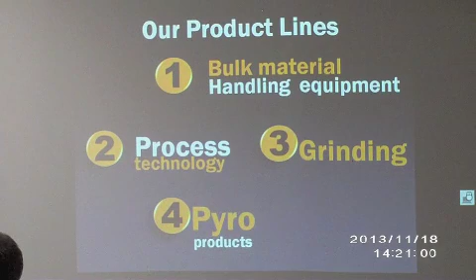Metso worldwide: bulk material handling, apron feeders, paving, ship loading, unloading systems, not like we used to do many years ago - all the car pullers, process technology. There's a really good brochure on the process technology - the grinding, the kilns.

Crushing and screening, which you guys are probably most familiar with. And when we hand out the binders, pass this one around too, because that shows all the different names that Metso has acquired. You guys will maybe see some of these names - not just Stephens-Adamson, but Nordberg, Allis Chalmers, all the different lines in the quarries and the pits. It's all Metso now.

What was Svedala is Metso and then some. Nordberg was originally one of the main names of Metso.

In June of this year, we had a kickoff, and screening conveyor solutions and conveyor solutions became one group. Now the main offering to you guys, when I hand out the binders, there are a couple brochures in there with products that I probably shouldn't have put in there. It doesn't mean you guys aren't going to have access to them down the road, but things like the truck box liners right in the front - right now, we're still overviewing exactly who we're obligated to contractually.

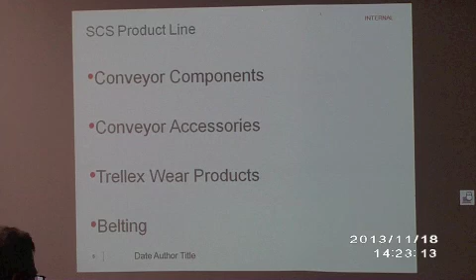Now I want to go over to this one. This one kind of takes a minute or two to boot up. This is the past, this isn't what we offer today, but I really wanted to bring it with me, even though it was way too heavy for my carry-on baggage. This shows everything Stephens-Adamson did years ago, all the products that we did.

Now there is still maybe sliders and a few products in there, but for the most part, it's all the bulk material handling equipment. Just shows you a little bit of the history of Stephens-Adamson.

Sealmaster bearing line - you guys familiar with that line? Yeah. Manufactured, engineered, and designed in Belleville, the plant where I started with. The lady who's our fill-in front desk receptionist, she started on the Sealmaster bearing line when she was 18.

I sat and listened to her for one of our acquisitions - when we were bought out by Borg Warner, Borg Warner wanted one thing from us, and one thing only, and that was the Sealmaster bearing line. They got it, kept us for like 3 or 4 years, got rid of everything else, but kept the Sealmaster.

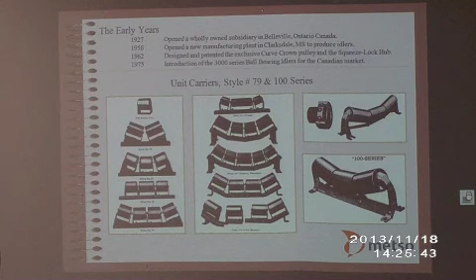In 1958, they opened a manufacturing facility in Clarksdale. The Belleville plant has just recently closed. The company took a big undertaking financially to put all the equipment under one roof in the Clarksdale, Mississippi plant. They put several million dollars into that plant in the last year or so - $7 million. They're already looking for a good return on that.

So with all the equipment from Belleville under that roof in Clarksdale, it used to be that the Clarksdale plant was just an assembly plant, while the Belleville plant was more of a job shop. The heavy duty idlers were done in Belleville, and the light and midi duty idlers were done in Clarksdale. Now Clarksdale is doing it all.

I don't know how familiar you guys are with the oil sands in Fort McMurray, Canada, but that's been one of our number one customers since the 70s. One of our plant managers, now our technical manager, Corey Goody, went out there in the 70s. I'll show you the idlers they have in there - they're actually CEMA F, and they're working on a CEMA G rating for the idlers right now. We manufacture idlers, and there are one or two competitors that manufacture idlers that are actually G rated, which is still being established. F is the highest that CEMA recognizes.

Here's the CEMA book too. We'll get that going around.

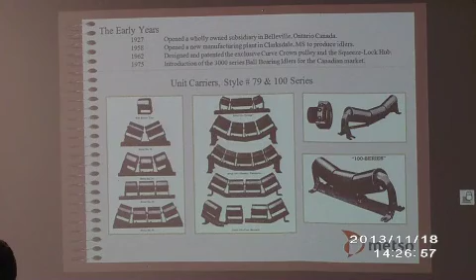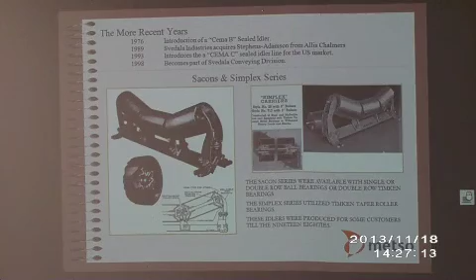You were your own - okay, so there you see where it comes, when it became part of Svedala. As I said, in the fall of 2001, Metso acquired Svedala, and I think they learned real quickly that they acquired a very big juggernaut.

The Dynapac compaction paving - they sold that line off right away, and they got a really good price for it. Gardner Denver down the hole drills was part two, and they sold that line off. I was actually involved with that line a bit.

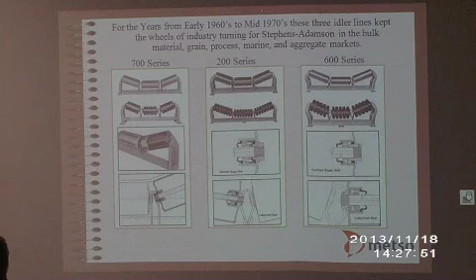So here's some of the older idler series. Some of these, some of the ship loading and unloading systems still utilize these today, and they'll call in wanting replacement rolls for idlers that were put in back in the late 60s, early 70s. There's all the idler series.

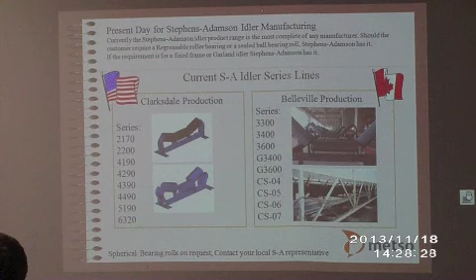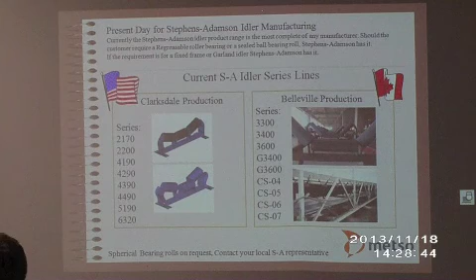To be honest, one of the things we're doing right now is we have such a huge idler line that we can offer some things our competitors don't, like offset frames - only one competitor offers offset frames. Regreasable idlers, some of our competitors have that too. We want to always be able to offer our whole line, but we're not going to stock as much as we used to. It'll be more that if somebody still wants an offset frame or a particular regreasable idler that you got 20, 25 years ago, we'll be able to supply parts 98% of the time, unless it's a real rarity. But we're going to try so we can be more dedicated to what we do best.

Okay, so I'm going to go on. All right, let's get right into the idlers.

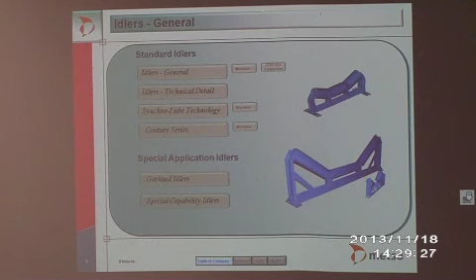Okay, so see these two idlers right here, let's try this out. That big idler right there, that's a 60 millimeter CEMA F rated idler that's used in Syncrude, Fort McMurray, in the oil sands - 84 inch, 7 inch diameter roll, 60mm shaft.

The little one there, that's an 18-inch CEMA B, which you'd see in the real smaller operations with 18-inch conveyors. But you're talking a big difference in price, big difference in technology, and when you actually see them together in person - the one's huge, the other one looks like a dinky car. But that shows the extreme of what we offer, from the heavy duty right down to the very light duty.

Alright, let's go back. Let's take a look at these.

How many of you guys are familiar with garland idlers? That's one of the idlers that's extremely utilized in Fort McMurray, as I mentioned. Some of the rolls are interchangeable, actually, from the garlands to the fixed frames. The advantage of garlands is handling irregular lump sizes, belt training, and transition point changes. There's not a huge section in the CEMA book on garland idlers. They're still getting everything straightened around on garland idlers as far as CEMA.

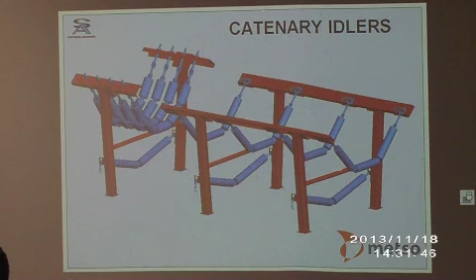Can I add something, Mike? Absolutely. CEMA, just so you guys know, regulates the industry and tells us what we have to do for belt measurements. So when you're looking at a belt, say a 36-inch belt, it's always belt width plus 9 inches for your foot spacing on idlers. So if you've got a 24-inch belt, just add 9 inches to it, and that's your spacing from foot pattern to foot pattern. That's standard industry - CEMA says that's what you've got to do. CEMA also tells you what roll diameter or bearing loads have to be, so they're very involved, to make sure we don't cheat with undersized products.

Every CEMA class goes from B, C, D, E, to F, but you guys for the most part will only be involved with B's, C's, D's, and E's in this area. Probably 90% of the industry here is B's and C's most likely. But they tell you it's going to be a 17mm shaft, or a 3/4 inch shaft, and you can't get away from that. CEMA just says do it.

So you have to be aware - when you're looking at conveyors with a 24-inch belt, whether it's us, Superior, FMC, or Precision, the bolt hole spacing is always the same. Doesn't change. That book I'm passing around is the 6th edition; they're currently working on the 7th. The only difference you'll see is in power plants.

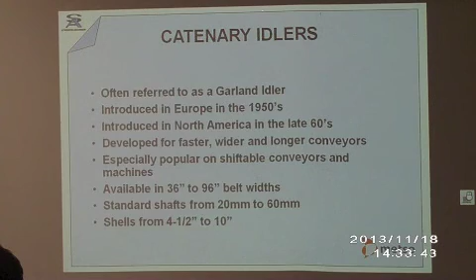Do you guys call on a lot of power plants? I don't. There might be some wide base idlers in there, what we call a wide base. If you see one, it'll be belt width plus 15 inches, and those will be wide base idlers. I'm glad you mentioned that - if you see that, just tell us it's a wide base, that's all we need to know. That's tripped up a couple of the CSRs over the years. That's how I started this company, as a customer service rep, so I remember that one well.

The frame - that kind of shows all the benefits of a garland. If you guys see garlands out in the industry, keep in mind there's no CEMA standards on garlands. Everybody makes theirs differently - can lengths are different, the hooks connecting the rolls together are different, and the hooks on the channel are always different.

What would be the typical industry that would use those? Long overland conveyors, turning corners and stuff, like mining - especially with irregular size mining material. So you won't see a whole lot here, not in western or eastern PA. You won't see a whole lot in this area. You might run across a little bit up in the northern part, with the shale.

But, you know, I've been covering this territory until my new position, and in the 18, 19 years I've worked for Metso now, I've only had 2 orders for garlands. They're not very popular - you run across them occasionally, but keep in mind, when you do, we have to have samples of them. We need measurements, because none of them are standardized - you just can't say it's for an 18-inch belt. That means nothing to us when it comes to garlands.

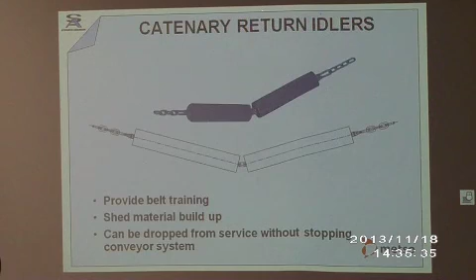3-roll, 5-roll. Yeah, with the garland idlers, we are one of the frontier companies with the garland idlers. And as I mentioned, Corey Doty in the oil sands in the 70s kind of tinkered and tested.

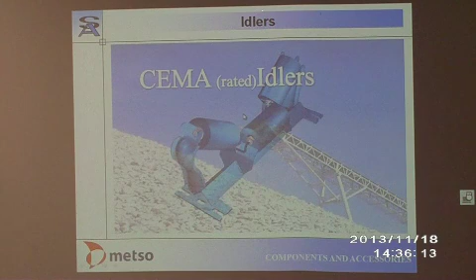Go back to the 21, go to Idler's General. And then go to 2100 series and go up from there, I think. I would have. Okay, I was getting there slowly, Todd. Okay, okay.

So I kind of already covered some of this, but it talks about CEMA, how they rate idlers. Todd actually hit on it better than I did. All right, let's get into it. You guys are gonna know almost all of this, but there might be the odd thing you haven't seen.

Can you go back to that first one, please? Absolutely.

So now, our return rolls are 3 inches longer than a lot of our competitors. That's the number I have in my head. Inch and a half to 3 inches longer in returns, most likely.

Returns are one thing that CEMA, even though the bolt hole spacing still has to be belt width plus 9, or belt width plus 15 on wide base, CEMA doesn't regulate to us what that roll has to be lengthwise on the return side. So all the manufacturers try to lock ourselves in, so we all have our own brackets and different roll lengths.

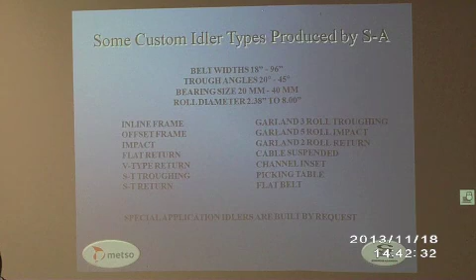Let's get, okay, let's hit on this one here. That might show us. So here's some of the terms: inline frame, offset, impact, flat return, V-type return, self-training troughing, self-training return, all the garlands, channel inset. You guys see many of the channel insets on the portable systems and everything? No familiarity? Couldn't hurt to go over.

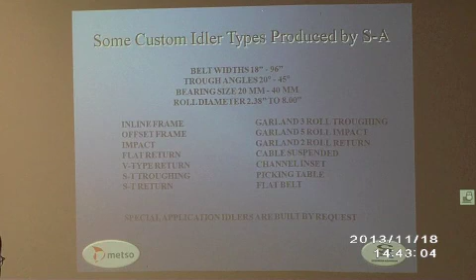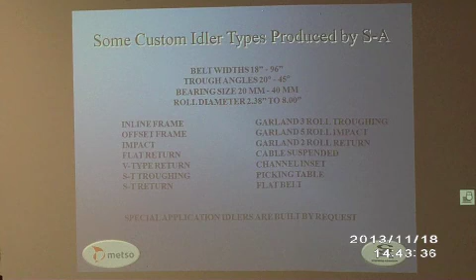Do you know the difference between a standard trougher and a channel inset? No? Okay, explain to them what a channel inset is. It's more like a bed box, and it sits down in, and it's utilized a lot on the portable conveyors more than anything else, right Todd? Yeah, basically a standard trougher sits up on top of the angle, on the trusses, and you bolt it together. A channel inset bolts on the inside of that channel. What it came out of was height restrictions on portable plants on the highway, so if they could lower it by 2 or 3 inches, it was a tremendous thing for them. But they get mounted inside the channel, not on top of the channel.

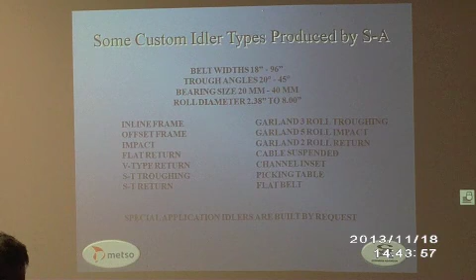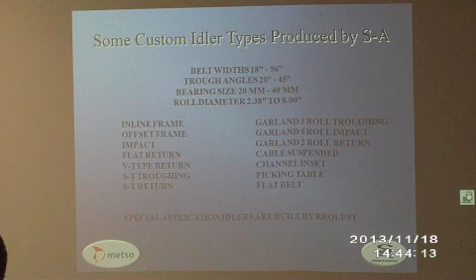You'll see them on a lot of portable plants, portable crushing plants, portable screening plants. You won't see them much inside the plants themselves, maybe a little bit at some asphalt plants. But it's probably only going to represent about 10% of the stuff you see out in the field when it comes to channel insets. There are a couple of our competitors who make that their day-to-day bread and butter, and they're a little stronger on channel insets than we are, but that's one of the things at the Clarksdale plant - with the revamping and all the money that's been put into that plant, they're looking at that more closely, and we're going to look at having a stronger operation on the channel inset.

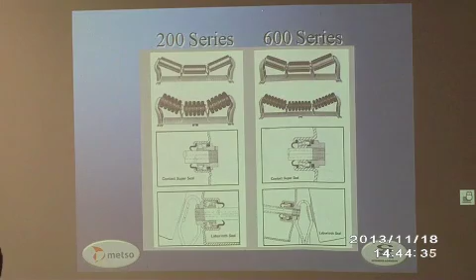Hey Todd? 200, 600 series, 3000 series, 2250. So did you guys catch that number in the middle? That's the 25 millimeter shaft size. The number in the middle, the number on the end - so if this is a 2255, that'd be a 5-inch can roll, and this number here is the shaft. So if it says 4395 - 4195 is a better analogy - that's a 5-inch diameter, 19 millimeter shaft. We'll get into that a little more.

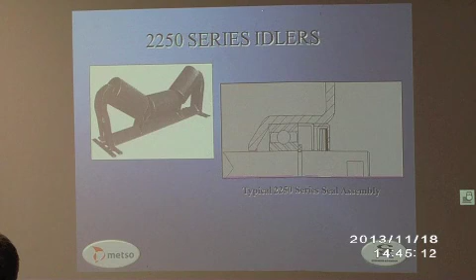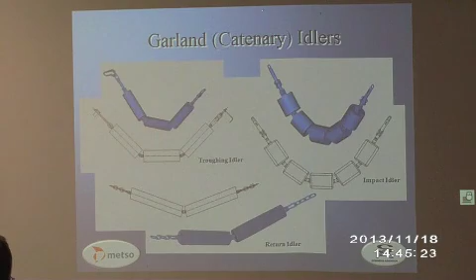There's a Century series. Are they going to rename that Century series? They're probably going to look into that a little bit, right? About the 3,000 series. Yeah. Let's get out of there. So Garland and Catenary are pretty much one and the same then? Yes, correct, absolutely.

Let's just hit quickly on the Synchro-Lube. There, now you start seeing - go back a little bit. I think this is kind of interesting when you start looking at regreasable idlers. There are a lot of our competitors who've basically discontinued them or just made them a special for regreasables.

We take great pride in our regreasable system and how it's done. Most of our competitors with a regreasable system, you cannot use air on them - you have to hand pump them or you blow the seals out. With ours, it doesn't matter what side you grease from, you can put as much air as you want on it and you will not blow the seals out. It's unique, and it's a system we call the Synchro-Lube system. Go to your first slide there, Mike.

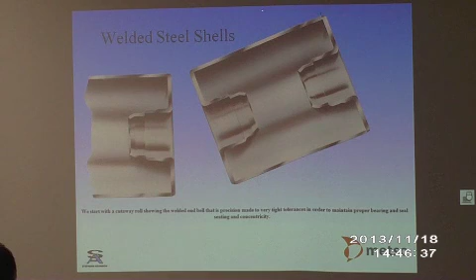There. Yeah, keep it right there.

All the shafts on the Synchro-Lube system are hollow shafts, so grease can flow through them all at once. Most of our competitors will just put a hole right here in the bearing cavity, and what they want to do is push pump grease through this thing, build up some pressure, and just have grease go in.

All you're gonna do... we've taken it one step further, and we've got these little compensating tubes we put inside there. Very small people at the factory get into that tube and put these little tubes in. We made the machines to do this, and it's just plastic tubing. It goes in the shaft and goes up the shaft.

When the grease is pumped through and reaches the other side, it wants to back pressure. So grease now is going in those tubes evenly through all 6 bearing points. So when you see grease come out of the seal here, it'll come out here, here, and all the way across at the same time. All the bearing cavities are getting greased at the same time.

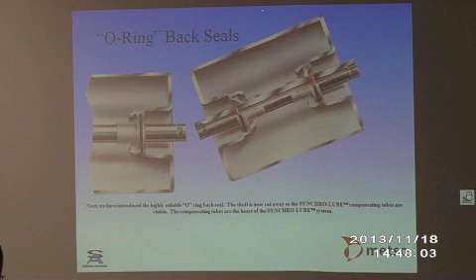Our competitors just have the grease -- you just grease this cavity, and that's it. The old grease is discharged into the can, so you don't know if they're being regreased whatsoever. The pressure relief they use is on their zerk, that's where they get the relief, the pressure off the zerks, and when they build up pressure and pop the grease thing off the zerk, you'll see the grease come down the zerk. That's the way they do it.

We took it one step further. We have it go through the bearing cavity, and then when the seal's on there, with our seals, the grease goes through the bearing, re-greases that bearing, and then goes to the seal, and it purges that seal out and cleans it out.

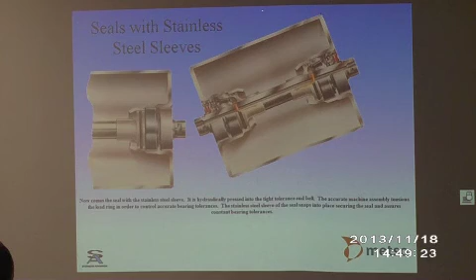Each seal has purge holes -- there's 4 purge holes on every seal. When grease comes out of those purge holes, you'll see dirty grease come out first, then you'll start seeing clean grease come out. That's how it's re-greased -- you know it's greased. You get all the contaminants out, all the water out, everything out, and it's done.

Every roller is connected using compression fittings. They're not just floating tubes in there -- they're all connected on compression fittings. So it's a sealed system. You don't have anything to release -- it stays in there.

And then the grease comes out on all the seals. So when you start greasing this side here, or the other side, it doesn't matter -- all 6 of those bearing cavities get greased at the same time. It's by far, and I think all of our competitors say by far, it's the best greasing system out there. Problem is, people just don't grease anymore.

I was down in the Caribbean a couple, 3 or 4 years ago, and we've been selling this guy idlers for years and years. He says, Todd -- this Jamaican guy, Billy Segura -- he says, Todd, I can't, rolls are failing right and left, they're just failing right and left.

I said, Billy, you're greasing, aren't you? He said, every week we grease. So I get down there -- just gonna take a drink first. I said, Billy, let's get your maintenance guys, let's just go and start greasing. Grab some grease and some guns, let's go. I just watched the guy, he just walked up.

He got about 10 rollers up. I said, come on back here, boy, come on back here, go back to that first one.

Hopefully it wasn't African American.

Sat there and pumped 57 pumps before grease came out. They weren't re-greasing it, they were just putting grease back in the shafts. That was it -- before we got to the 3rd roller, go get another case of grease. So when you see this in the field, someone says they're failing -- especially when it comes to re-greasable -- they're not re-greasing, they just take a couple pumps and call it done. But those hollow shafts take a lot of grease. A lot of it.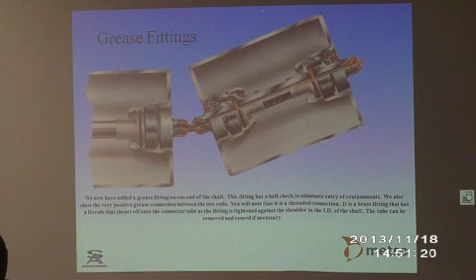So you're saying you can re-lube them from either side? It doesn't matter what side, the roller doesn't know which side you're greasing from. Do they come lubed from the factory? There's a grease fitting there on the end, that's all the grease going through the whole system right there.

We fill them full of grease when they leave the factory. We tell customers if they're sitting in your warehouse, especially in warm climates, or sitting on the job site for a month or so, re-grease them before you put them on. And it's correctly greased in the field once you can see the grease purge? Absolutely. You cannot over-grease them.

So you can use more, where do you think you see the industry heading here? Sealed for life ball bearings.

It used to be, probably 5 or 6 years ago, it was still about 60-40 — 60% for sealed for life, 40% for re-greasable. I'd venture to say now that re-greasable is probably less than 20% of our business. And the people that buy re-greasable only buy it for one reason: they want a tapered roller bearing, and that's it.

I keep telling you guys in the bearing business, what's a tapered roller bearing do when it's spinning? It throws grease off the bearing. If you don't re-grease it, that grease is gonna break down, become oil, and just leak on out.

What do you see with Magnus here? All sealed, yeah. The Canadian market went all sealed inline frame about 12 years ago, and then we went that way too. Because we had such a large offering, we weren't concentrating just on that one. Now we've even seen the FFCs we're replacing were greasable, but yeah.

I tell people to this day, the re-greasables have their place, nothing wrong with that. But you gotta be very cautious, because if they look at the cost now and they're not gonna re-grease — if they say I'm only gonna grease once every 6 months — don't put re-greasables in there. Just walk away from it, because you'll have nothing but failures.

Well, it's in every industry. Overall, manpower's down, but demand for production's up. So those places don't have the maintenance guys to be fooling with that anymore either.

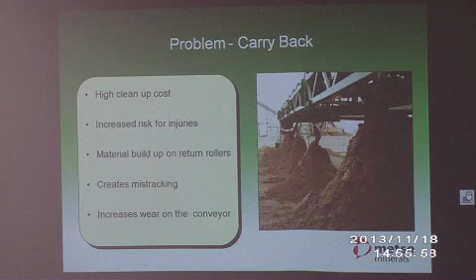All right, so carryback, right — one of the biggest problems for somebody in the belt cleaner industry: risk of injuries, material buildup, mistracking, these are common problems.

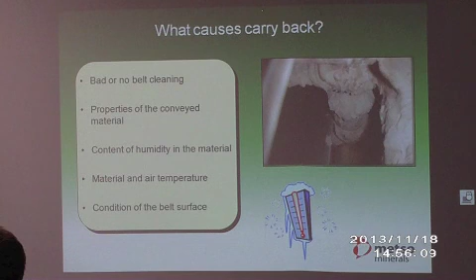Some of these pictures are good. You gonna let me know if any of these are the pictures you've taken? All right.

How many of you guys have installed belt cleaners?

It's been a little while since I've installed one. Todd injured his hand on one at a trade show. Everybody likes to tease him about that. Might as well, I sliced it up, maybe 6 stitches. So I'm not the one to install belt cleaners.

Can I ask a question before we go here? Yeah, absolutely. CEMA B, CEMA C, CEMA D - what differentiates the difference between a B to a C to a D? Is it quality, is it can size, is it angle?

It goes back to the envelope of CEMA that Tom was talking about with the shaft. Yeah, we can go back to your, you should just start, go to the idlers, and let's go through the 2100 series, 22, and the general, probably.

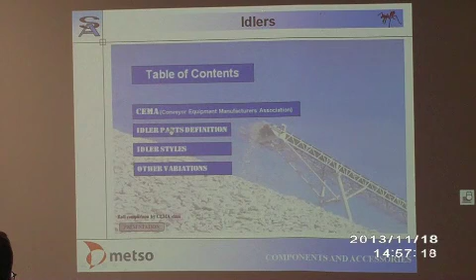Keep on going. I would imagine it's gonna be under here, or let's see. Table of contents, that's it. There's nothing else.

What's going on? I've got it probably in another presentation, but the CEMA, to back up a bit, it's load, right, and all your belt widths, your application, your material - the envelope of CEMA ratings, that's where it comes into play. If you have an 18-inch, 24-inch belt, light material, then you're gonna be a CEMA B, right? And depending on how fast it's moving, tons per hour, the application data sheets will help out.

So the further we go up the alphabet, the heavier it is. You wanna write this down? 2100 series, CEMA B.

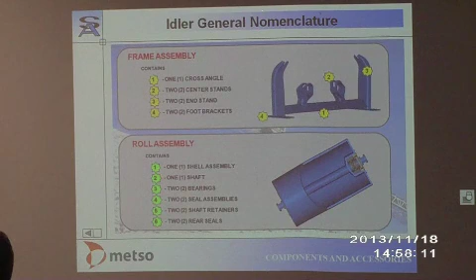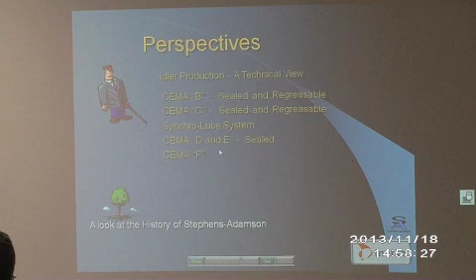So 2100 series, 2200 series are all CEMA Bs. They have 17 millimeter shafts. That's how you can tell a CEMA B. CEMA B comes in 4 and 5 inch cans.

Okay, so any odd numbers, 2100 series will be offsets. And that's the same, it runs through our whole book. When you get to CEMA Cs, it starts with a 4. CEMA Ds start with 5, CEMA E starts with 6. And then the next number after that, like 4100 series or 4300 series, offsets. 4200 series, 4400 series, in line. One will be regreasable, one will be sealed for life.

CEMA D only comes in one - that'll be a 5100 series. It will be an inline, sealed. It just changed a little bit. The CEMA E's go to 6300 series.

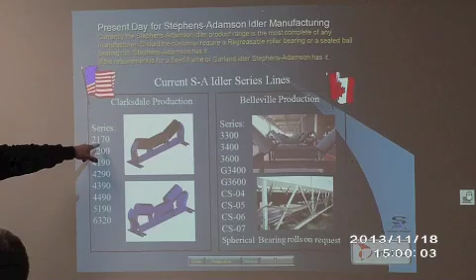So the 17 in the middle, like I had - that's a shaft size, right? 3400, 40 millimeter, right, 17. But for your industry here, disregard everything on this side of this page.

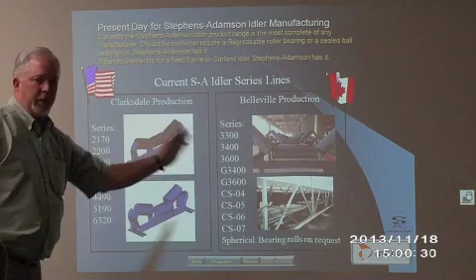Just disregard it. This is what you guys are gonna be 90% involved with. You won't see a whole lot of this 3400 series stuff. It's gonna be all the CEMA class - the Bs, the Cs, the Ds, and the Es. For the majority of your business, that's what you're gonna be dealing with.

Will our end user normally know what CEMA series he has? He's gonna tell you one or two things - he's gonna say, I don't know, it's a 5-inch can, and it's sealed for a 36 inch. You're gonna sit there and say, okay, let's do process of elimination now. What comes in a 5-inch can? A CEMA B and a CEMA C. Right, what's your shaft size? That's what you can go by. Only on Bs and Cs can you go by shaft size.

You get to CEMA Ds, now it's gonna throw you for a loop. The shaft size is the hollow shaft inside the roller - that's the shaft size, it's coming out like that. Double checking, I wanna make sure I know - on CEMA Ds, you're gonna tell, we have a CEMA, oh I got a 6-inch can, but I don't know what class it is. You can't go by shaft size on CEMA Ds, because we all turn down our shafts - they're still 3/4 inch coming out, but inside they're 1 inch.

Look at the end caps, the stands, the frames, it'll tell you usually. That last number tells you the can size, 4195 and 4196. Over here, 3407, 3406, G stands for Garland. Usually it's all 4400 stuff. If the customer tells you it's a 4-inch can, 99% of the time it'll be a CEMA B. If he says it's a 5-inch can, in line, probably 70% of the time it'll be a CEMA C.

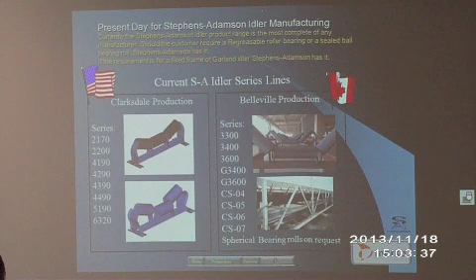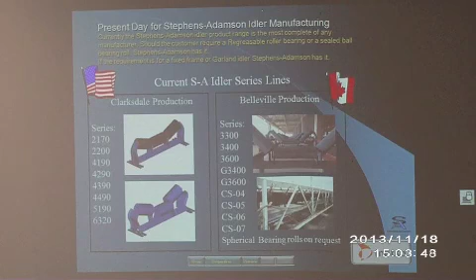So you have to be aware, the only one we didn't do it on is the new 2200 series. When we came out with the new CEMA B, 10, 15, whatever years it was, I can't remember now, we came out with the new CEMA B. We wanted an inline ball bearing, with a little bit better frame, and also a full foot bracket, because most CEMA Bs only have one bolt hole on the brackets. We wanted one with a full foot bracket.

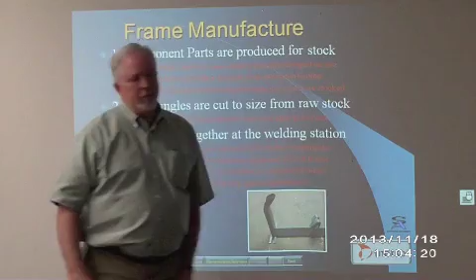That's the original B, like this, with one bolt hole. Stability-wise, that thing will rock a little bit. You can still use one bolt if you want, but with the full foot, you get rid of that rocking motion. Plus the frame is like 25% stronger now. So you can take that B and put it in a little bit better applications, a little more rock and so forth.

But a lot of your guys are gonna ask you - tell them when you're selling these things that it does have a 2-degree tilt, and be aware of that. We've had a lot of people over the years - most people do know it already, it's been around for 50 years - but you're gonna get someone say, hey, I got 50 idlers shipped in here, saw this arrow on it, we didn't know what it meant, so we just installed the items.

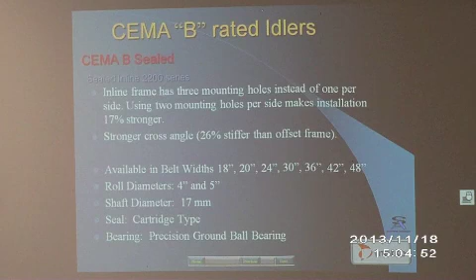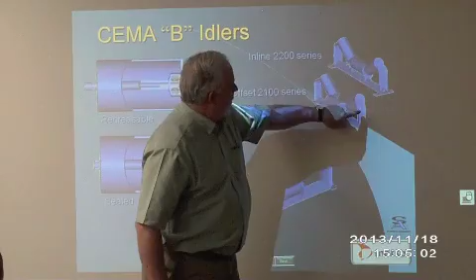So where on the frame would the arrow be? It'll be on this frame - well, not this frame, but it'll be an arrow right here, on the end bracket, and it'll be upright. Every end bracket on ours will have 3 things on it: it'll have the belt width, 36, 42, 24, whatever. You'll have a 20-degree or 35 or 45-degree stamp in it, and your arrow, and what class it is - it'll say 2100 series, 2200 series, 42.

It'll also come with a barcode. If you take a look at your technical bulletin, that won't be on there anymore. That's been on there for years, that barcode's still on there. That white sticker will not come off. That sticker has a lot to do with it - it's got an MC number on it that tells us when it was made and who it was made for.

Is it a pressure sensitive barcode, or are you talking about the label, or is it riveted? No, it's stuck on as a sticker label. Oh, okay. The barcode - we came out with them years ago to satisfy one customer and one customer only.

I was looking to see how that reads on their system. There are SKU numbers or model numbers and stuff like that, so with the Chicago warehouse up there, we had to put these stickers on everything we shipped to them. Those things mean a lot, because a customer calls and says this failed within 3 months, get that number off of it, and we find out we sold that to you 3 years ago. I just installed it last week, they'll say.

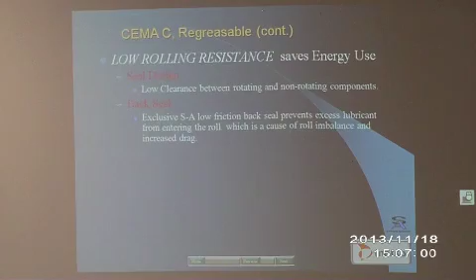Back to the arrow thing, the reason I brought this up, you'll see this a lot of places with reversing belts. You'll wonder which way to run the arrow. It doesn't matter, alternate the rollers. Have one arrow going one way, the next one going the other way, so they're not fighting against each other.

A lot of guys will try to put a washer under one side to bring it back out, but the washer doesn't do anything, all you're doing is tilting the whole frame, you're not drawing those things into an angle. So with reversing belts on a reversing conveyor, run them opposite - one normal, turn the next one around backwards, back to normal, reverse them, just alternate each one, and you'll have no problems whatsoever.

Not a problem installing on a mixture of manufacturers. On the troughing side it doesn't matter because we might be off by 1/16 of an inch on height somewhere. All we care about is the oval space. We all play games, our rolls might be 1/8 or 1/16 of an inch off, maybe 1/4 inch in length. But a 36-inch belt doesn't know you're off by 1/16 or 1/8 inch in height, so it doesn't matter.

You can have PPI, Superior, FMC, Continental, and that belt's just going to keep running. Now when you run tests, or customers want to run tests against us, don't put ours back in the load zone. Get ours up on the belt as far as you can get them, let someone else's fail back there.

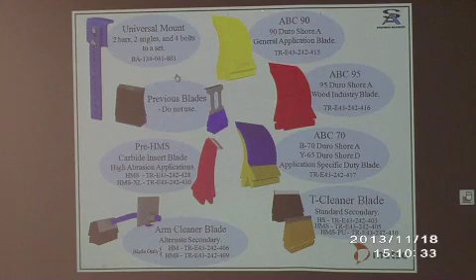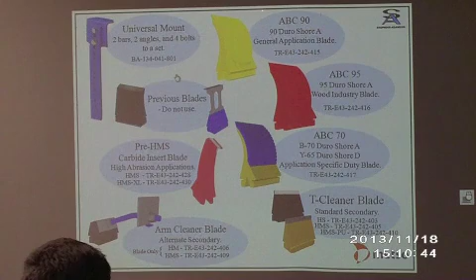Now, you jump in if there's something you want to see. I've installed this one, which is very unique for the wood industry. I call it the Roman column one. You're not going to see a lot of that. The arm cleaner, you're not going to see a lot of that one either.

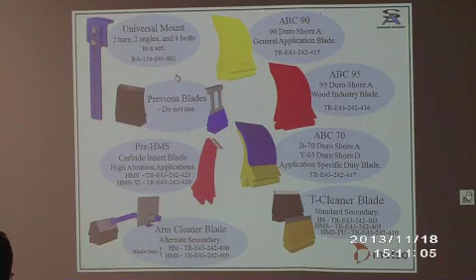Your main ones are these three right here, the yellow, red, and others, but they change color a bit over the years. 70% of your business will be the yellow blade at the top, the ABC 90. That'll probably be 70% of the blade applications you run into. The other 20-25% of what you have is the ABC 70, the dual color.

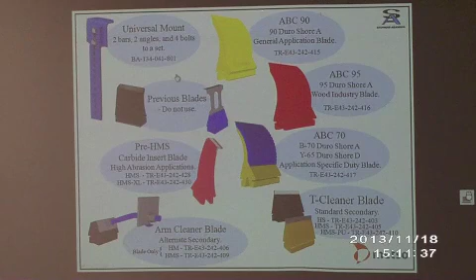And if you have a real problem application, it's the one-two punch, right? The pre-cleaner and the T-cleaner. Yeah.

There's going to be some consolidation when it comes to our belt cleaners. What ones we're going to keep and which ones we're going to discontinue, I can't tell you 100% right now, but the ABC 90 and the ABC 70, those two cleaners will still be in our product mix. Some of the other stuff you saw in there will probably be taken out. I should say, they will be taken out.

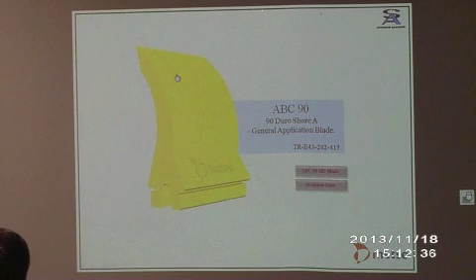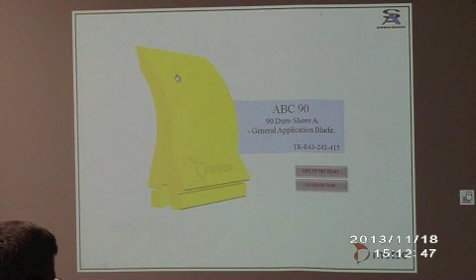We've got a new cleaner coming out, and we're going to debut it at ConExpo in Las Vegas in March. It's going to be a one-piece blade with a very simple tensioner system, and it'll probably be half the price of our standard ones right now. What's nice about the one-piece blade—I've got about 10 of them in trials right now between Pennsylvania and Ohio—the blade itself will also fit a Martin cleaner. So you have replacement blades now to put on Martin cleaners if you want to. It gives you more sales.

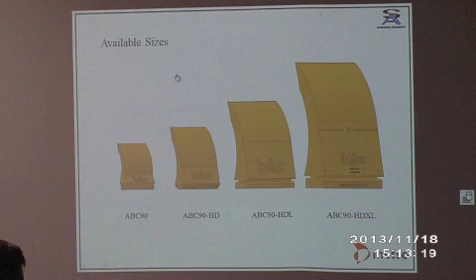How we do these blades, there's a little talk about how we're going to do it. We might sell these one-piece blades in huge blanks. You guys can cut them off to whatever length you need. All you've got to do is cut them off, drill two holes, and it's ready to install. It'll fit a Martin holder, it'll fit a Flexco holder, one-piece blade. So our blade will cover like three different manufacturers. Don't change anything on their holders, do nothing. All you do is mount our blade, pin it in, and you're off. So it'll be pretty nice once this thing gets released.

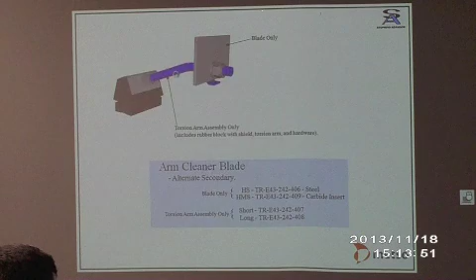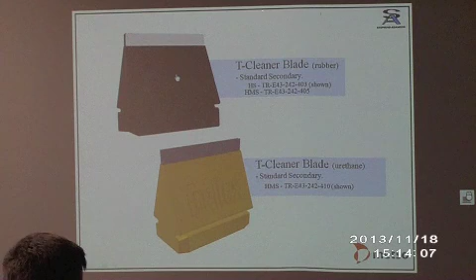And I think I was telling you earlier, yes. Our goal right now is to have most of these things ready for the general public by ConExpo. But we have to make sure that we have the literature, the infrastructure, all of this stuff in stock. We don't want people calling up wanting 10 of these cleaners and we don't have them. So we have to beef up the inventory here in the States, and finalize the design. We've changed the blades twice now in the last year and a half, but the final versions are done. We just need to get everything ready by ConExpo.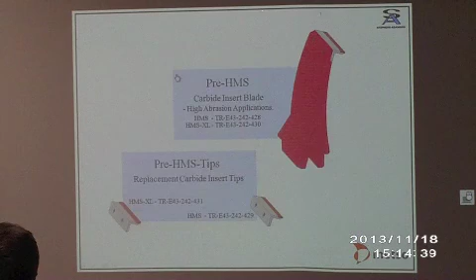So you keep referring to a one-piece blade—it sure looks like, if I'm looking at the catalog... yeah, that picture, those are segmented, go back one slide. Yeah, they don't have the blade in here. There you go. Those are segmented blades, it depends on your belt. If you've got a 24-inch belt, 30, 36, it depends—these are 6.5 inches wide or something like that, I forget. So depending on the belt width, you can stack them in there.

What's nice about the segments, a lot of people have pros and cons about them. One nice thing is if you damage a blade, you can take it out and put another one in to replace it. If the ends are wearing faster than the center, you can move them around a little bit. A lot of people say it's just easier to throw the thing away and install a new cassette and go. Yeah, but like I said, there's pros and cons. If you're looking at it from a sheer standpoint of getting the best dollar value out of the money you spend, changing segments in the long run is the best application.

Now, do our customers do that? Probably not, let's be realistic about it. They're going the easiest route, and it's less wear and tear on them—it's easier for them to pull two pins out, throw it away, and put another one back in. The big thing to watch for is overtension, right? Yep. So I would take it the competition is moving to a one-piece blade. All one-piece blades—literally the last ones coming out are one-piece blades, for a lot of different reasons.

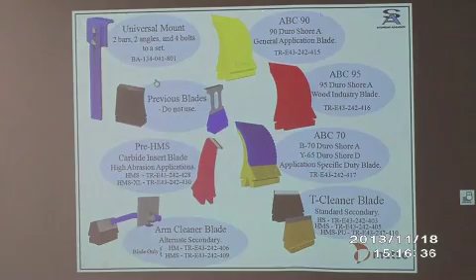Our research and development for cleaners is done by our home office in Trelleborg, Sweden, so what the market is over there is what we get here. We've complained for years - when you get belt cleaners from us, except for the new one coming out, all of our belt cleaners are metric. All the hardware, everything is metric. Belt width's in metric, and we've complained for years. We need imperial. The new cleaners coming out will all be imperial, and there'll be a metric version also.

But Dave, you said you got one of those, you showed me that one. I have a 24-inch. Do you have the whole system here, the tensioner and everything? Did you get it in for a customer or just get it in? We just got it in for this promotion, so people can see what it's like, and well, we like to sell it too, probably.

Well, especially since it's gonna get replaced by new cleaners. I've always said that poor thing's probably sitting back there lonely right now. Should buy a matching pair. It just got here, it's not too lonely yet. Has any customer pointed out anything they liked or didn't like? Customer's not seen it yet, it just came in, it's only been here for 2 days.

Let's talk afterwards, we might be able to participate a little bit with some promotion for you, put some added incentive in there. But it's here if anybody wants to see it. I'll carry it down, if you want to show it off, hands-on or whatever. I put the cassette on it, but there's separate boxes with all the mounting hardware - it's not mounted.

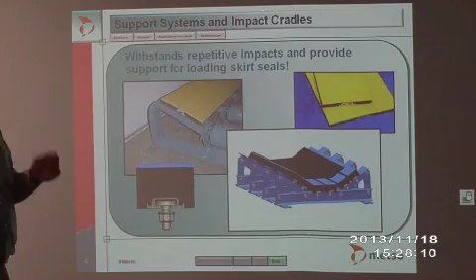This one here is a standard one, we sell the majority of them. It's nice because all you gotta do is loosen the bolts, this thing lays down, and you can work on it. The bad thing is the bars have to come out long ways, you gotta slide them out, unless you want to take every single bolt out and just pick it up and take it off. A lot of people just want to slide the bars out and replace them like that. It's easy, it takes some time, it makes it kind of rough. But then you can just lift the belt right back up, put it back, and it's together.

Then there's the side pull-out. Side pull-out's great because you can just pull it out, but here's the one problem. People are putting these things in and forget about their skirt board and all their hangers. They go to pull them out and oh shit, everything's obstructed in their way because they put everything else back on after they put the bed in. So you need a 4-foot, 5-inch span, a clear opening, or you'll never pull it out.

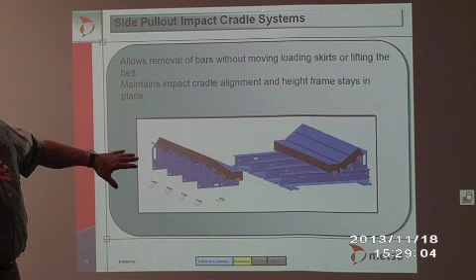What's nice about this is you can pull it out to here, put the bolt back in, and just have it hang right there and work on it. So it makes it kind of nice. That one, the side pull-out, is probably about 50% stronger than the side fold down. So when you've got bigger rocks, I'm saying 10-inch plus, 12-inch plus, dropping 4, 8, 10 foot, go with side pull-out.

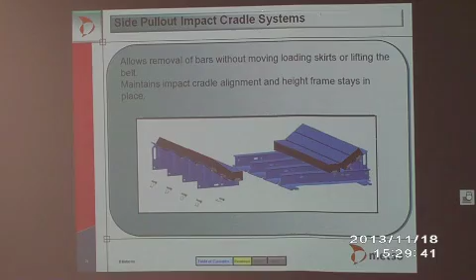If they don't want to go with side pull-out, go back to that side fold down. You get big rocks that come in here, in between these frames, these bars want to bend, rocks will hit them. We made that simple: add a fifth frame. I got a 4-footer that comes with 4 frames, shorten that span up in there so you don't get those dips, put the frames all together and add one more, because 5 frames will fit on a 4-foot bar.

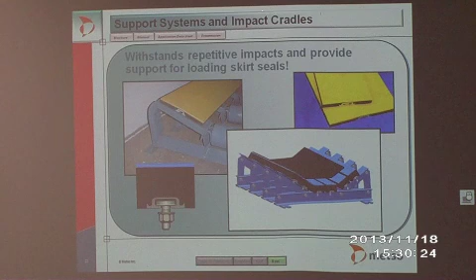And we'll sell extra frames. That way you got those pads almost up against each other, and you don't have that gap in between where the bars can bend. Customers will want 6 foot, and we can go 4 foot and a 2 foot. We'll make any configuration you want when it comes to impact beds. But keep in mind, we don't want to go past usually 6 foot on a span, because you get too much friction on that belt laying on that thing, and it just has too much sitting and gripping it. So usually what we say is every 4 or 5 foot, especially 5 foot, put a roller in between your impact stations, just put a trough roller in there.

Here's what you were talking about with the sealing. Well, there's an example of how you've got your sealer coming down. Have you sold a lot of the sealing systems? Nope, I haven't sold a lot of them in Canada. It tends to be application specific.

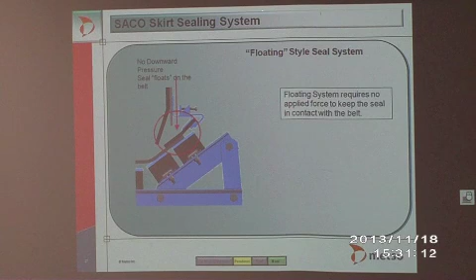Belt conductor. We do cover that one. You guys, well, they've never come across a belt conductor at all, right? Number one purpose, training the belt. It basically automatically keeps it coming back.

You guys have all seen trainers on conveyors, and you've seen how trainers work. Trainers, that thing has to be pretty much cocked all the way to one side before that belt tries to push it back over. So it's got to be cocked pretty good before it wants to cock itself back. That thing's always working, it could be 10 inches off before it tries to bring it back.

With the belt conductor, it just works constantly. That belt moves a quarter inch, that conductor's constantly trying to center it.

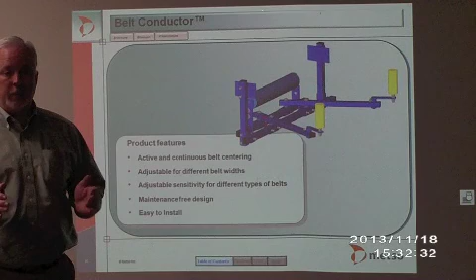Where you mount these is about 10 foot before the tail pulley, and that's where you want to track a belt. Because if the belt isn't tracked going off the tail pulley, it won't be tracked on the top side. So you want it as straight as you can leading into that tail pulley, so when it comes up on top, it's straight. That belt conductor, 8 to 10 foot, somewhere in there, but it works constantly. That thing just sits there and moves constantly. That belt moves a quarter inch, it brings it right back immediately.

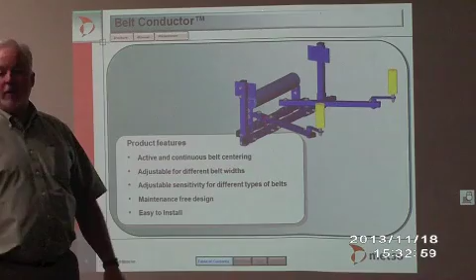What's nice about the belt conductor, one size fits all. All you gotta change is a roller in it. Have a conductor for an 18-inch belt, put an 18-inch roller in. You want to make it a 42-inch belt, put a 42-inch roller in. Once you get to 48, we put a spacer in it to make it wider, and then you put a 54 or 60 in it.

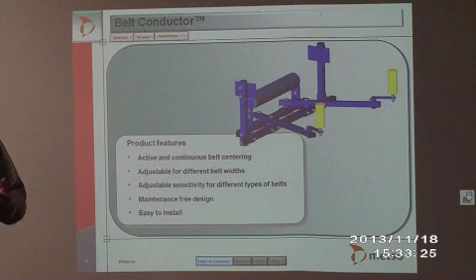What's nice about that is, customer has a 24-inch belt, can't track it, bring a conductor in, solve the problem. Two years down the road, for some reason, they change that conveyor out and they want to put a 30 or 36-inch belt in it. Still use a conductor, just put a 36-inch roll in it.

But it works constantly, all the time. That belt, like I say, when it moves a quarter inch, it brings it right back immediately. There's nothing of having to swing out there and shove it back at one time.

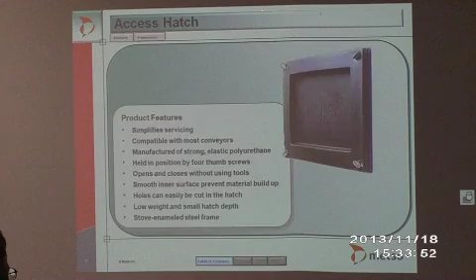It's a problem solver. It does not replace troughing idlers or trainers on the trough side. So if you have a customer putting a new 500-foot conveyor in, you still got to put trough trainers in there. You cannot just say, I'm not going to do trough trainers and put a belt conductor in. That's not what it's there for.

So it's on the return side, but it's a problem solver. It doesn't replace trough trainers or return trainers. Don't think you can put a 500-foot conveyor in and not put any trainers on, and fix the problem just by putting a conductor on it. No, it won't work that way. You still gotta put every 200 foot some type of trainer, a trough trainer or a return trainer.

This is only a problem solver. If you got a customer that's tried everything, because we've all seen it, most of these conveyors in sand and gravel pits, limestone quarries, or wherever, they do get hit occasionally with loaders. They'll tell you it never got hit, they'll tell you it's straight as can be. But that's what the belt conductor was out there for. It was a problem-solving solution to a customer-specific need when he could not train a belt.

All right, let's move on to holdbacks.